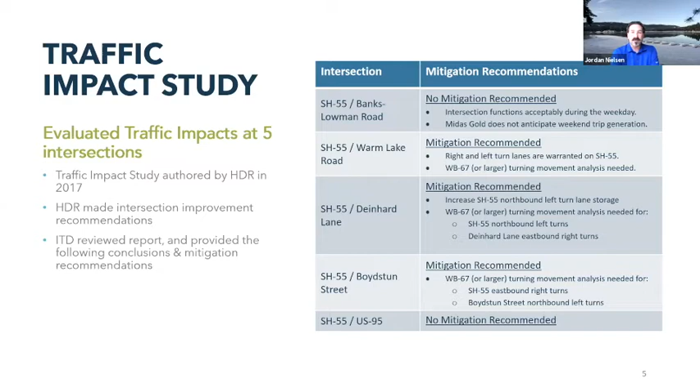If everybody drove by themselves to get there, coming from the south and north on Highway 55, and then projected it out into 2025 during operations, taking the background data available now and adding about a 3% per year increase in traffic volumes. Our operational traffic going north of Warm Lake, or coming from either direction, is about a 1.3% increase, making up 1.3% of total vehicles. Similarly, from the south, about 2.7%.

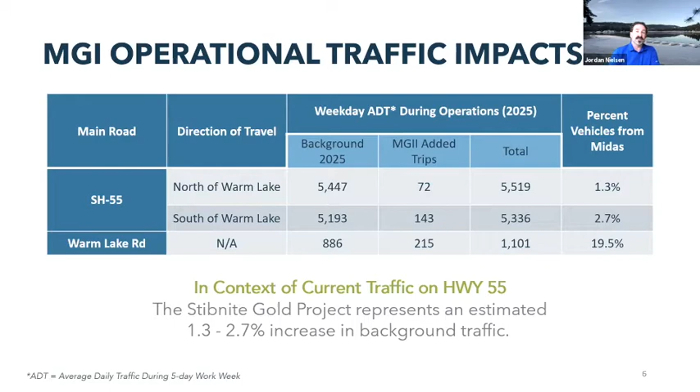If you're coming out of Cascade heading north towards Warm Lake Road, we're going to put in a deceleration lane and a right-hand turn lane for vehicles turning onto Warm Lake Road. Similarly, traffic heading south from McCall towards Cascade will have a deceleration left-hand turn lane onto Warm Lake Road. And if you're coming off Warm Lake Road towards Cascade, there will be an acceleration and merge lane into southbound traffic. To accommodate that so traffic doesn't get stuffed up, we'll add a through lane west of the intersection so traffic heading south can continue without being impeded.

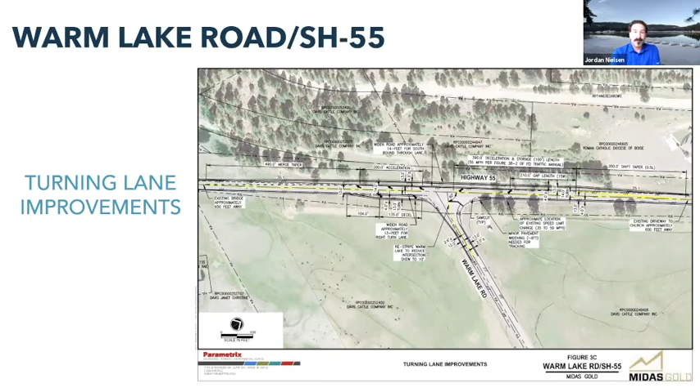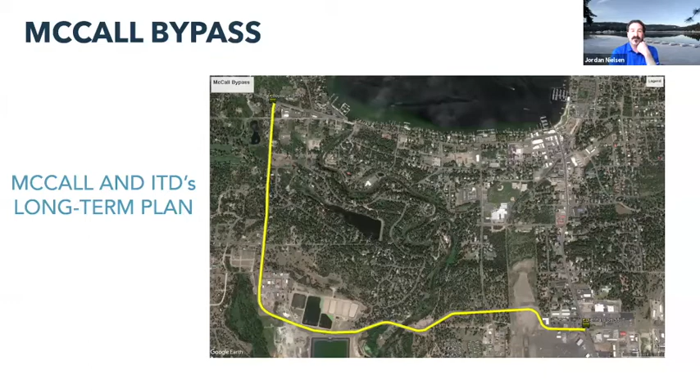Next intersection, please. Okay, so the yellow line signifies the McCall bypass. McCall is to the north where the lake is. Where the line starts to the east is where the airport is, the northern extent of the airport — that's the beginning of Deinhard Lane. And where it goes past the lagoons and heads north, that turns into Boydstun Street. So we're proposing intersection improvements at either end of those yellow lines. Next slide, please.

But the biggest impact is at the southwest corner where the airport is, in order to allow our WB-67 tractor trailers to move through the intersection — there are already these types of vehicles coming through with the logging trucks, and if anybody's been in this area, it's a little tight when they're coming through. So we've got to pull back that southwest corner. We'll keep the beautification project the city of McCall did years ago, just need to move it out of the way. And we're going to add a right-hand turn lane for vehicles coming east on Deinhard, approaching the intersection, turning south or right towards Cascade.

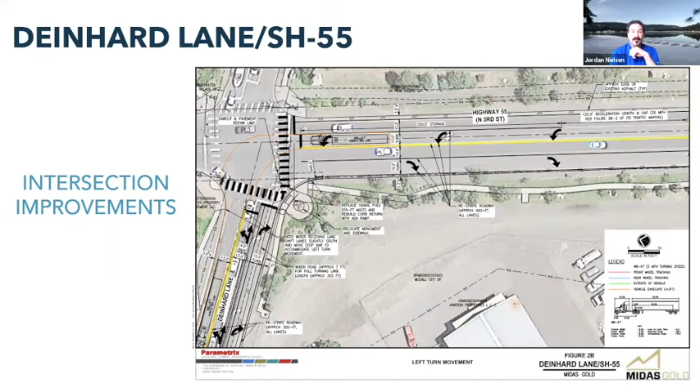We do want to add, if you're traveling out of McCall to the west heading towards Brundage or New Meadows, a left or deceleration lane onto Boydstun Street and a through path to continue on towards New Meadows. It takes a little bit of rejigging of the geometry of the intersection, but very little — the majority would be to the north, where we have to add a little more fill to widen the road.

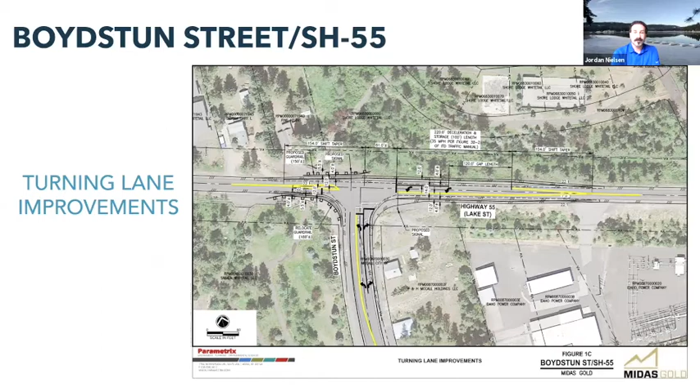Next slide, please. Okay, touch on the Burntlog route now.

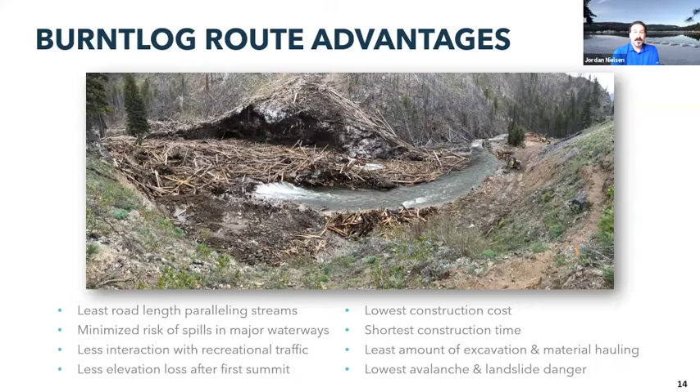As far as operation and maintenance of the road, it should be around 25 to 30 years. We're proposing right now that it should take about 2 to 2.5 years to build, during the summer months, so that's really reduced down to just a few months each year. But we anticipate having the bulk of the road done and built in 2 years, with maybe a little bit of surfacing needed in the 3rd year.

We're proposing to use that road for 12 to 15 years of operations, and then approximately another 5 years during mine closure and restoration.

We're proposing during the summer months dust suppression, and when we build the road, we'll build that into the roadway with binding agents. We obviously need to maintain clean culverts—we don't want sediment getting into any of the waterways. We'll be clearing mudslides during the summer as they come, typically in spring runoff or breakup, and then resurfacing or reshaping the road on an annual basis as well.

During winter months, we will have some avalanche control. We've studied it and know there are some avalanche paths, but we feel we're above most of them. Still, we'll need to maintain the roadway throughout the winter, mitigating the potential for avalanches, clearing snow on a daily basis, and providing traction during the winter months.

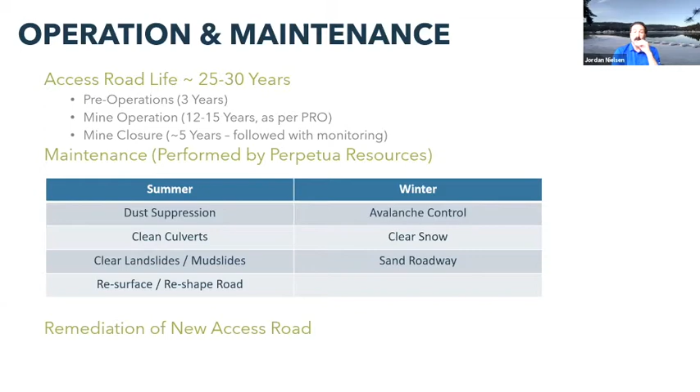All right, next slide.

When we first submitted the plan of restoration and operations, we had not identified or provided for public access through the mine site. In scoping, we heard from some vocal folks in Yellow Pine specifically that was not amenable. So we went back and asked, is there a way we can provide public access? People who know this area well like to get up to Thunder Mountain or over to Cinnabar, and want to be able to come through this area.

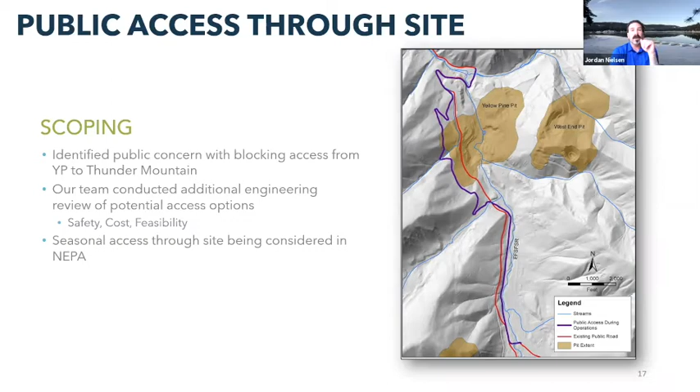In this figure, the red is the existing public road. For many people who know this area, the Yellow Pine pit, shown in brown, will take out or obliterate that current public access. So the purple is our proposal for public access during operations. It'll be about a 14-foot wide road, with grades not exceeding about 12%, allowing horse trailers and such to get up and around the project. Currently, on the north lobe of the Yellow Pine pit, we'll be crossing the upper bench of the pit.

Yes, and that's an alternative. We have that in as Alternative 2, I believe, in the draft EIS to provide access.

You're probably wondering how you'll get back to Landmark and then on, since a lot of people still like to ride to the Stanley area. So during construction, when we are using Johnson Creek Road, we're proposing a parallel road to the west, about 16 feet wide. It won't be a road exactly, it'll be a winter groomed trail. For about two and a half, probably two winters, the trail will parallel Johnson Creek from the Trout Creek campground south to Landmark, and then allow you to get back onto the Stanley Landmark Road.

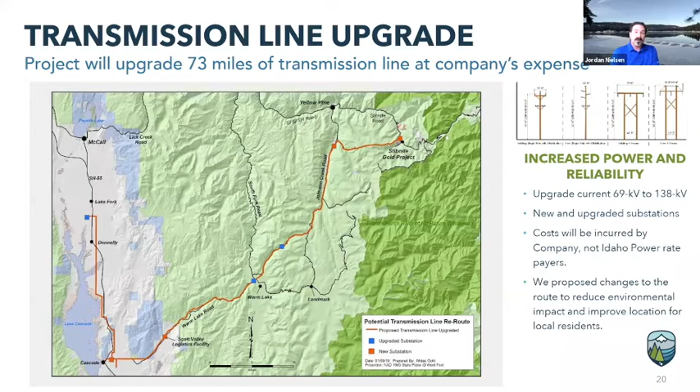In the original plan of restoration and operations, our proposal was just to follow the existing route. Through scoping and discussions with some of the landowners along the way, we were able to find a couple of reroutes. One was able to avoid wetlands, which is the railroad grade reroute we have here.

This is just north of Little Donner. If you're heading north from Cascade to McCall, it's the one hill you go up and over, then drop to the north, with the reservoir on the west. The existing route is the purple one, and it goes right through a bunch of wetlands on what I think is Bureau of Reclamation land. So what we've proposed is to move it slightly north onto the existing, old railroad grade, and that way we avoid those wetlands.

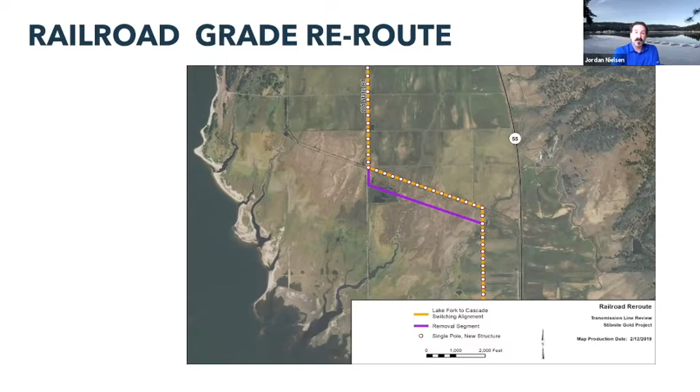This second reroute is what we call the Pearsol bypass. Currently the transmission line is a combination of the red and purple. What we're proposing, instead of following from the Cascade switching station south, is to go east along Weant Lane and then northeast through what's called Thunder Mountain Estates.

We are proposing more of a straight shot route, the hot green line there. It'll follow Warm Lake Road, cross Warm Lake Road right at the old Crawford Ranger Station, and then follow the southern extent of the Boise National Forest and Idaho Department of Lands properties before meeting up with the existing transmission line just on the east side of the figure there.

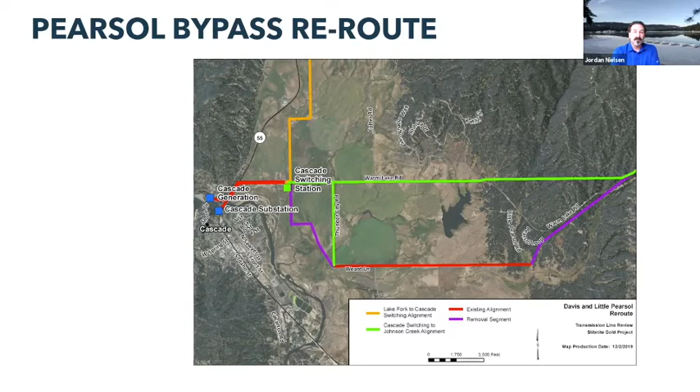That way, we heard from several people in the Thunder Mountain Estates who were concerned about the increased height, voltage, and width potentially of the transmission line. So we feel like we found a pretty good alternative to mitigate those concerns. Next slide.

All right, offsite facilities. I've talked a few times about the Stibnite Gold Logistics facility in Scott Valley, about 8 miles east of Cascade. The other one I haven't really mentioned too much is the Burntlog Maintenance Facility, which will be required to maintain that road during the summer and winter months, since it's quite a ways out there. I'll show you a couple drawings of what we're proposing right now.

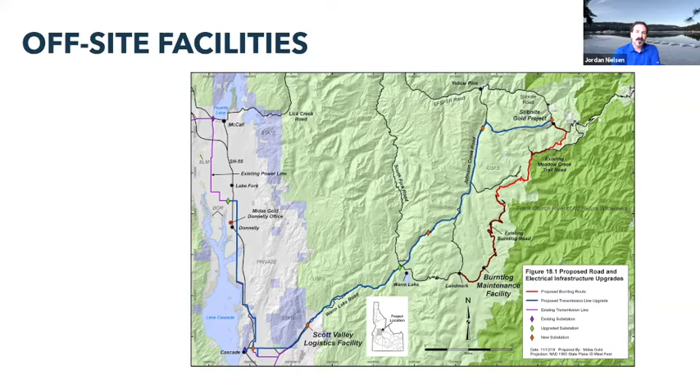Here's the Stibnite Gold Logistics facility on Warm Lake Road. Here's where we'll have our mine personnel parking in the south, bus parking a little bit closer to the north. We'll also have an admin building, our laboratory, our assay laboratory, and our core sampling, logging, and storage area.

We'll also have our warehouse, a large laydown yard, and what I didn't touch on with the transmission lines, we will have a substation on the northern portion of this property. It will be replacing an existing substation in the valley that provides power to the 3 or 4 homes in the area. We're just going to move it to the north to our property and then do an underbuild back to those homes to the south.

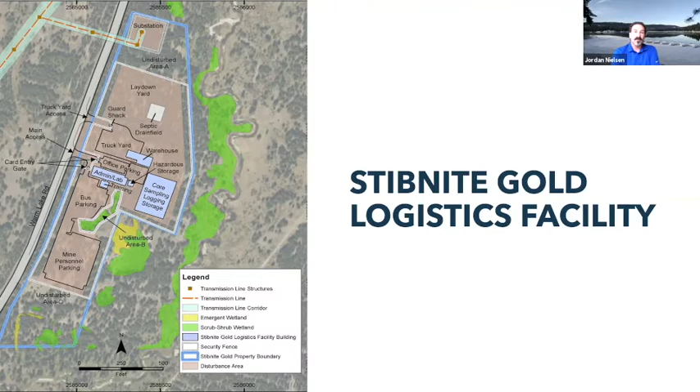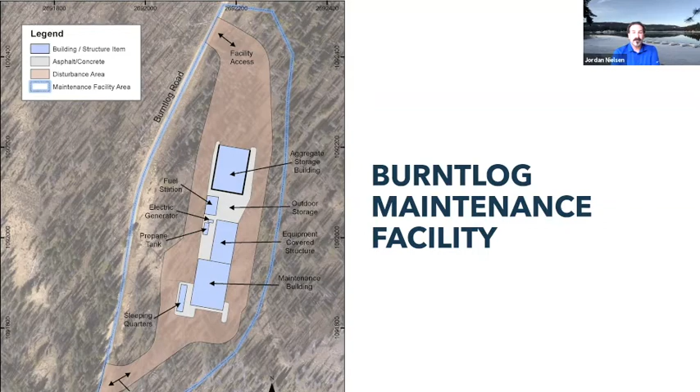So number one, we feel like we're addressing those concerns and providing the funds to improve those intersections to work safely for the public and our traffic. As far as public commuter buses, I can't really speak too much to that, but I know there's a desire to reduce the amount of traffic traveling to the logistics facility as much as possible. There are conversations going on right now to pick up people as far away as New Meadows, maybe even further, to get them to the logistics facility so they don't have to drive their cars individually.

As far as the Warm Lake upgrades and maintenance, we haven't submitted a proposal yet, but we're working on one with Valley County, a maintenance agreement. We'll be putting forth a maintenance agreement and working with them to nail down the particulars of that. We understand that we'll have impacts to the road, and we'll help provide solutions to that as well.